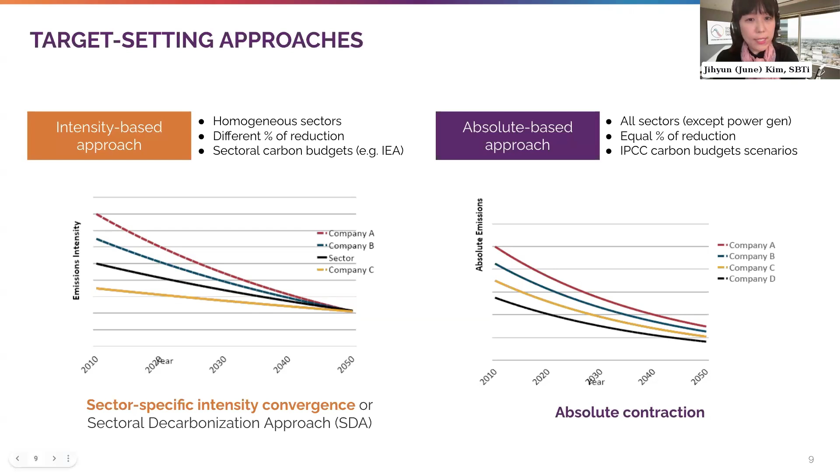The other method, on the right side, is used for all other sectors or emission sources, and is called cross-sector absolute reduction. It expects all companies to reduce emissions at the same annual rate. Both of these methods are used in the building criteria, and their application will be explained later in this webinar.

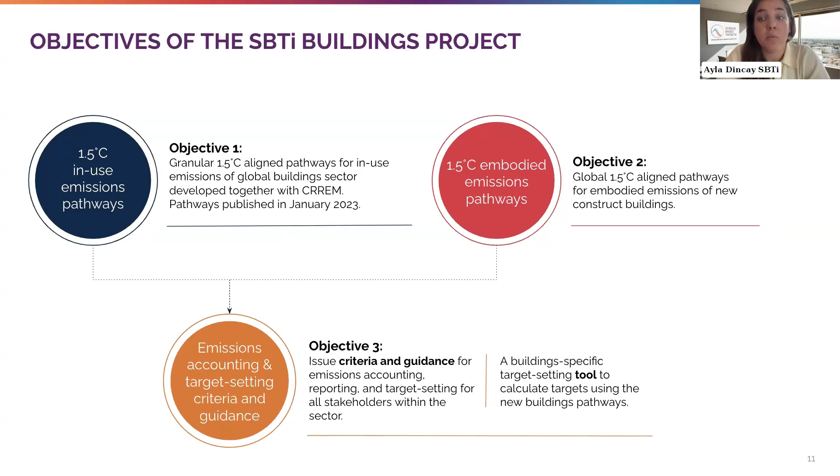The third objective was to develop criteria, guidance, and a target-setting tool for the built environment to develop and set greenhouse gas emissions reduction targets within the unique context of the building sector.

All companies and financial institutions should start their science-based target-setting journey by familiarizing themselves with the SBTi Corporate Net Zero Standard, the financial institution's near-term criteria, and the explanatory document. These documents provide the basis on which the sector criteria is built on.

As part of the buildings project, we have developed the following technical outputs. First one is the buildings criteria. The criteria document includes mandatory criteria that companies in the sector are required to follow when setting science-based targets.

Another important document is the building's explanatory document. The explanatory document provides further guidance on how to set targets using the criteria. It does not include new mandatory criteria.

The third important document is the embodied emissions pathway development description. This document provides background information on how the embodied emissions pathways were developed. The last document listed on this slide is the building's target setting tool.

This tool has been developed to help businesses in developing their emissions reduction targets following the sectoral decarbonization approach, or SDA for short, and the sector-specific absolute contraction method. The tool aggregates the targets resulting from the SDA and the absolute contraction method into an overarching company target.

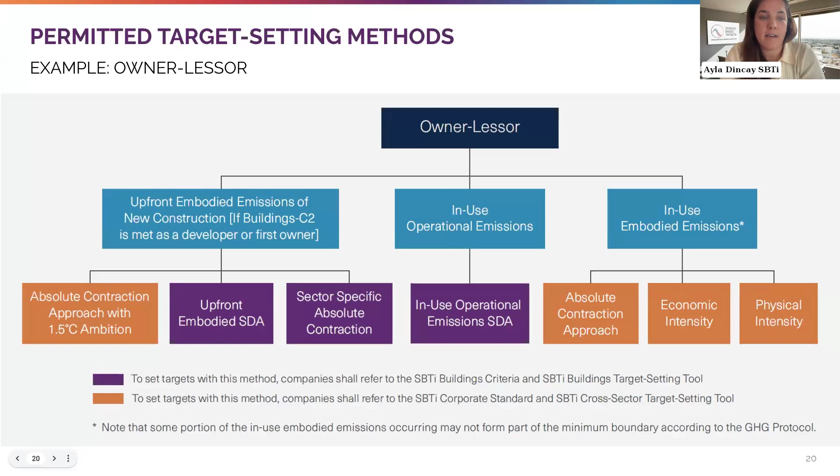And then moving to buildings C6, one of the important concepts included in the buildings criteria is the whole building approach. Companies must use this approach when accounting and setting SDA targets for in-use operational emissions.

Following the greenhouse gas protocol, companies have to account and allocate in-use operational emissions to different scopes in their inventory as usual. However, for target setting purposes, companies are required to follow the whole building approach, which means they need to aggregate all in-use operational emissions across all scopes into a single total.

The criterion C8 requires certain scope 3 categories to be included in the target boundary. The required emissions categories have been determined based on the relevance of each intended user's known business activities, the applicability of individual target setting methods, and the company's level of influence over associated emissions reductions. The details of which emissions shall be included within each user's target boundary are provided in Buildings Criterion C8.

For developers, this means the categories where upfront embodied emissions are accounted for. And for owner lessors, it means categories where tenants' operational emissions are included, usually category 13, downstream leased assets.

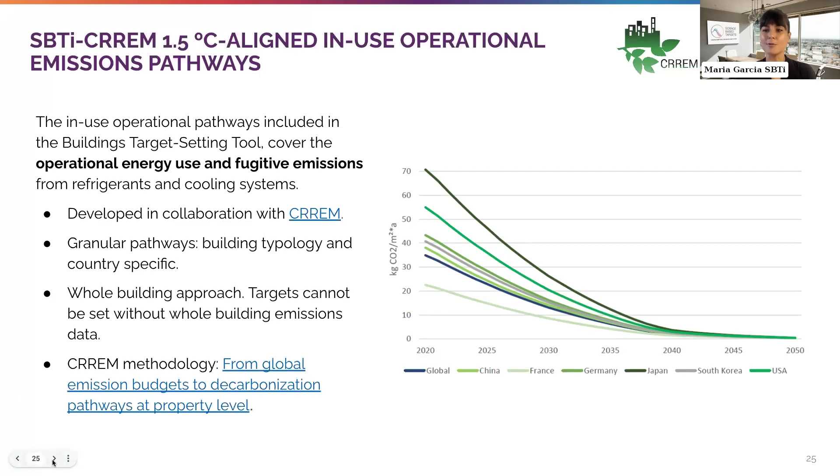All intended users of the building's criteria specified in criterion C3 are required to use the sector-specific intensity convergence approach, also known as the SDA method. Note that 'developers' is in brackets because if the developer meets the threshold for in-use operational emissions, it will be classified as an owner or property manager.

We have two deviations for this general rule. First, financial institutions can use all methods allowed in the financial institution near-term criteria to set targets on their real estate assets. The building's criteria provide guidance on the SDA targets, which is just one of the methods available. Second, property managers that may not have whole building emissions data available, and thus cannot follow the whole building approach, can set targets on their required categories using the 1.5 aligned methods defined in the SBTi corporate net zero standard.

The sector-specific methods are described in the building's criteria and the explanatory documents, but for other methods, users will need to refer to the relevant documents, which are the corporate net zero standard and the financial institutions near-term criteria.

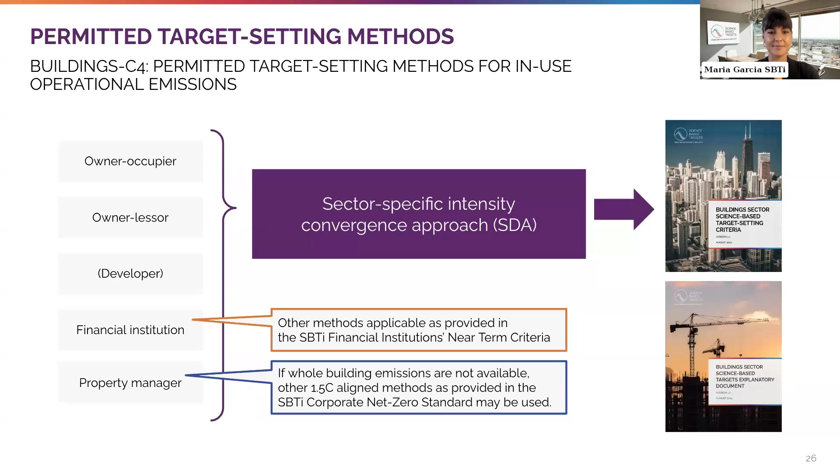Now I'm going to give you an example of how to calculate the in-use operational emissions using the buildings tool. On this slide you see a screenshot from the buildings tool, specifically the in-use near-term targets tab.

To start using the tool, you should begin in section A1 by selecting your preferred units. The SBTi uses the metric system, but unit conversion is embedded in the tool. Then the relevant geography is selected in section A2, and here we are using Spain as an example.

In section A3, the relevant building type is selected, and as you can see from the green OKs, all inputs are correct and the corresponding pathway has been found.

In section A4, emissions and activity data are included. In this example, a base year of 2022 is selected. The in-use operational emissions is an aggregation figure for the whole building emissions data. The floor area in the base year is entered, and as a target year we have selected 2030.

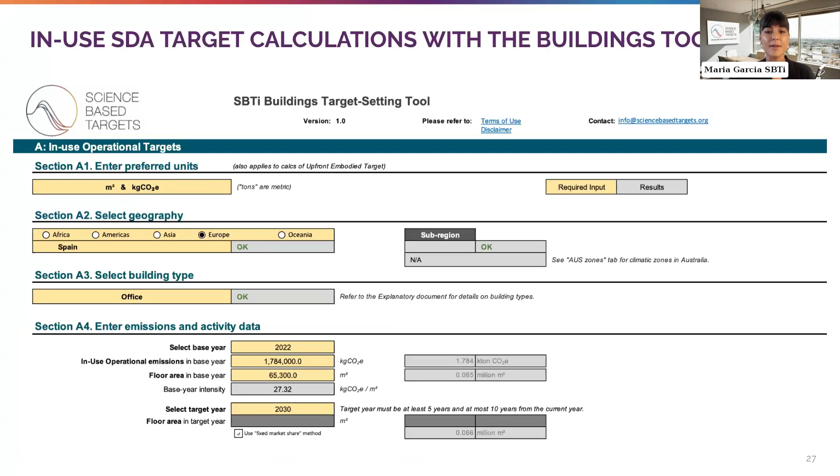Now that we have entered all the data required, we can scroll down to section A5 for the results. In our case, we move to the next slide. Here you can see the target modeling results. The tool calculates both absolute and intensity emissions for the target year, and the respective reduction rate for both as well.

For the SDA target, we look at the intensity graph on the right-hand side. The yellow curve is the selected CRREM SBTi pathway. The blue curve is the company-specific pathway calculated with the SDA for offices in Spain.

Based on the calculations, this company's target year intensity is 12.37 kilograms CO2 equivalent per square meter, and the reduction rate is 54.7% per square meter.

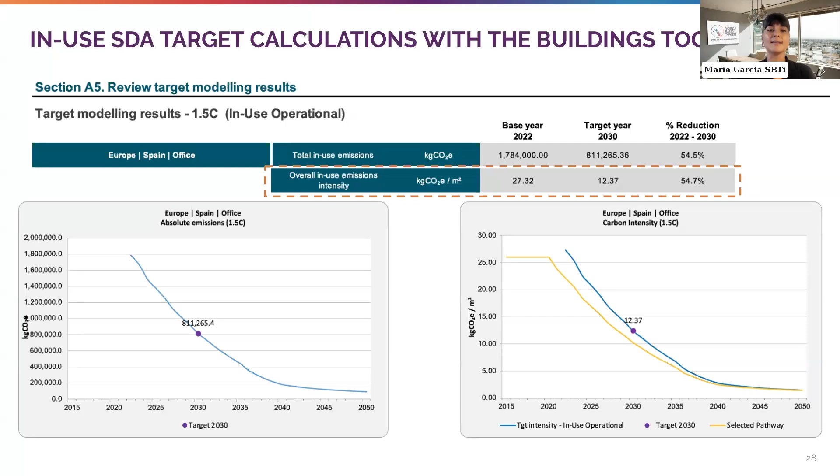Most companies have a more diverse target setting portfolio with a variety of building types and regions, and for these cases, the tool provides an option to aggregate targets.

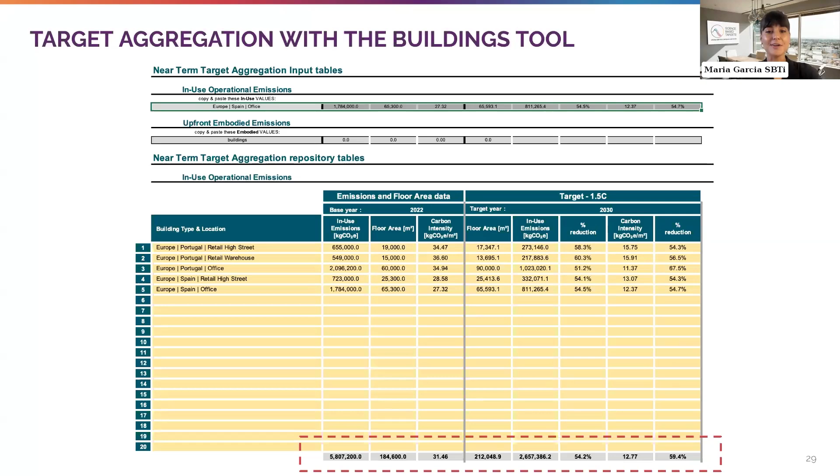Using the aggregated target reduction rate, companies can formulate their target. In this case, the wording would be as follows: 'Company X commits to reduce scope 1, 2, and 3 in-use operational greenhouse gas emissions of own buildings by 59.4% per square meter by 2030 from a 2022 base year.'

In the following slides, I will explain two alternative options provided in the buildings criteria for companies that are unable to set SDA targets, even though the SDA target setting method is the go-to option for most organizations.

The first special target setting option is called the fixed intensity target, developed especially for organizations with a high turnover in their portfolio. Companies and financial institutions with high portfolio turnover may find the SDA method challenging for reasons including reduced ability to effect building improvements due to short hold periods, difficulty collecting complete and accurate whole building use operational emissions data, and a frequent requirement to recalculate targets due to regular significant changes in the portfolio.

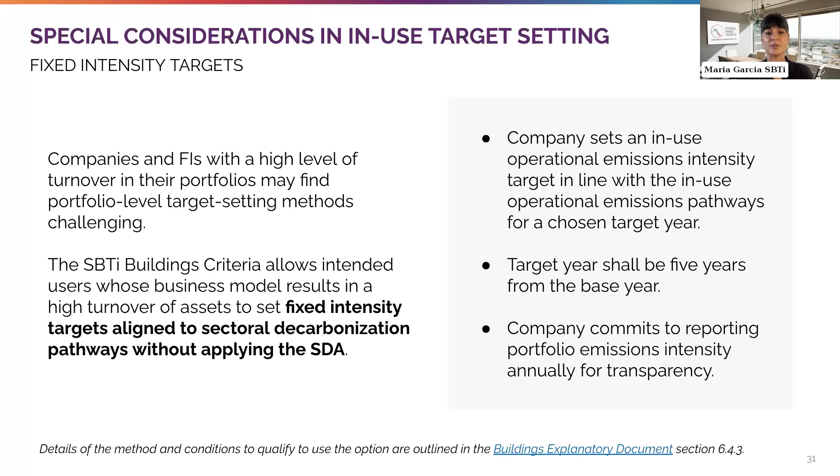In short, this means the company sets an in-use operational emissions intensity target in line with the in-use operational emissions pathway for a chosen target year. The target year shall be 5 years from the base year. More details of the methods and conditions to qualify for this option are highlighted in the explanatory document in section 6.4.3. Other relevant sector criteria still apply to companies and financial institutions choosing the fixed intensity target method.

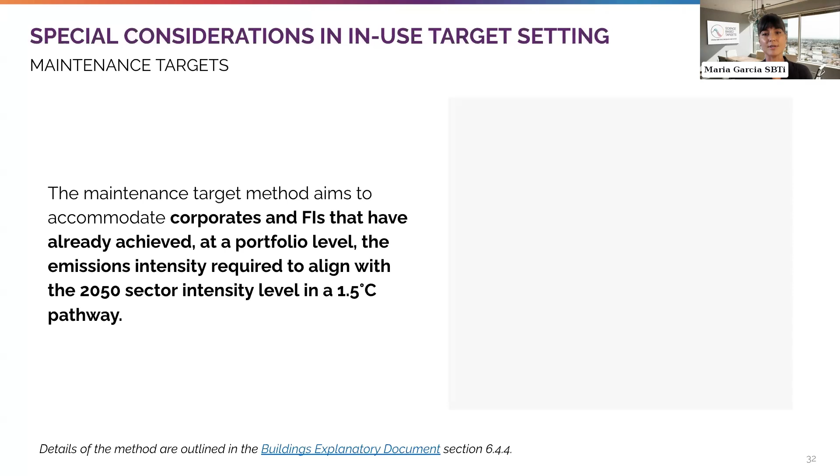The second special target setting option is for companies and financial institutions that have already met the emissions intensity required to be aligned with the 2050 sector intensity level. In this case, a company can commit to maintain the base year portfolio. They also commit to only finance and hold 1.5-aligned real estate assets. Companies with diverse portfolios can choose the lowest target year intensity of the relevant pathways.

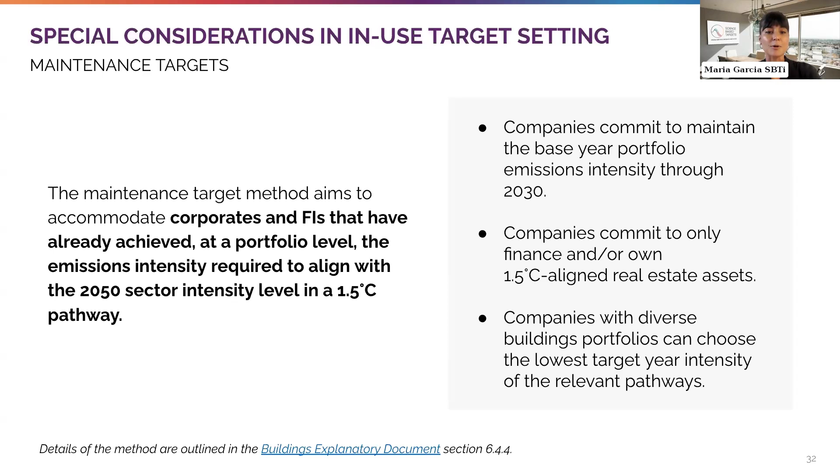And with this slide, I have reached the end of this section. Now I will hand over to June, who will facilitate a Q&A session to cover questions related to what has been presented so far. Thanks.

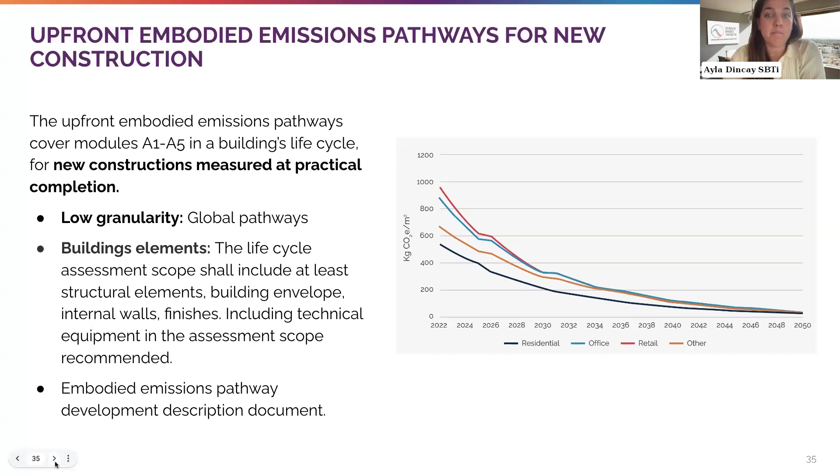Next, I will go through the target setting methods applicable to these pathways.

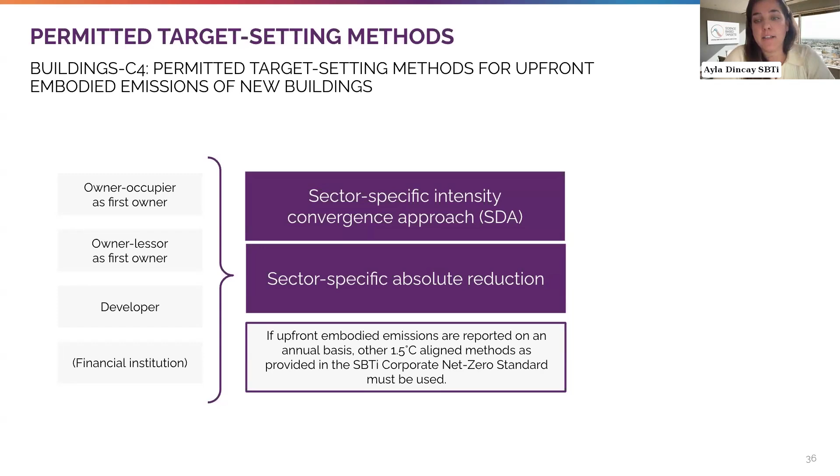These methods are only applicable when embodied emissions are reported in the inventory upon completion in Scope 3 Category 2 capital goods. If embodied emissions are reported in different scopes and categories, usually on an annual basis, 1.5C aligned methods must be used as provided in the SBTi corporate net zero standard.

The sector-specific methods are described in more detail in the buildings criteria and the explanatory document. For other methods, please refer to the corporate net zero standard or financial institutions near-term criteria.

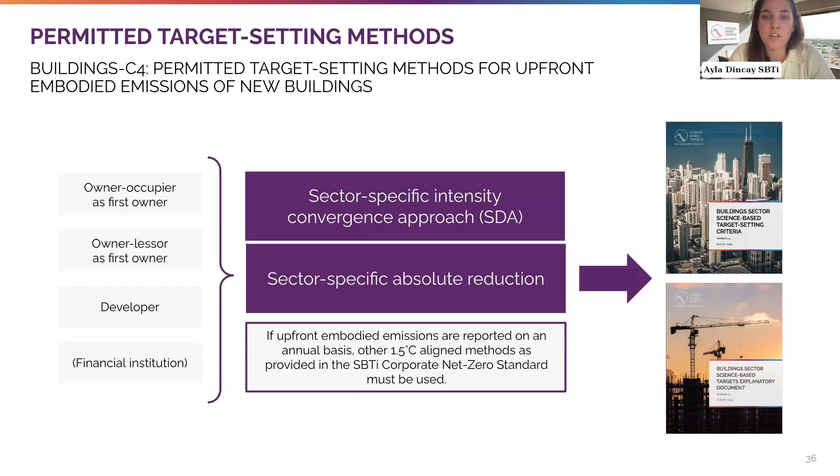Next, I will share an example on how upfront embodied absolute reduction targets are formulated using the buildings target setting tool. Setting SDA targets for upfront embodied emissions of new buildings follows a similar structure as for in-use operational SDA targets that Maria explained in the previous section, which is why we look at the absolute reduction target now.

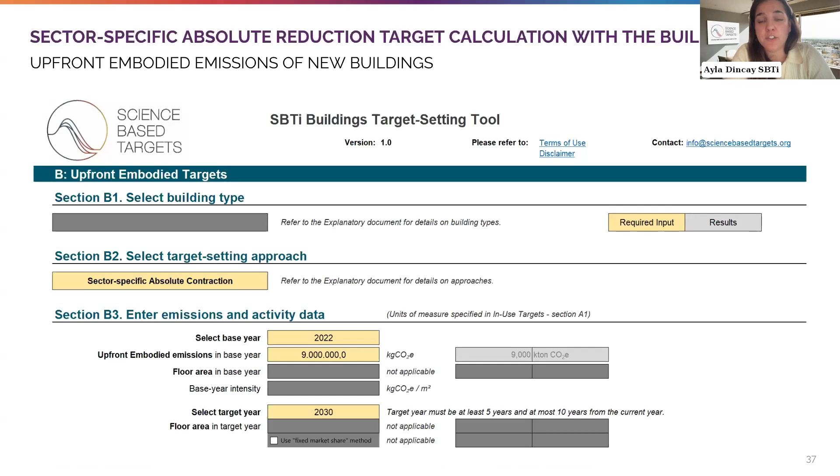Based on the calculations, this company's target year absolute emissions should be reduced by 30.9% in absolute terms.

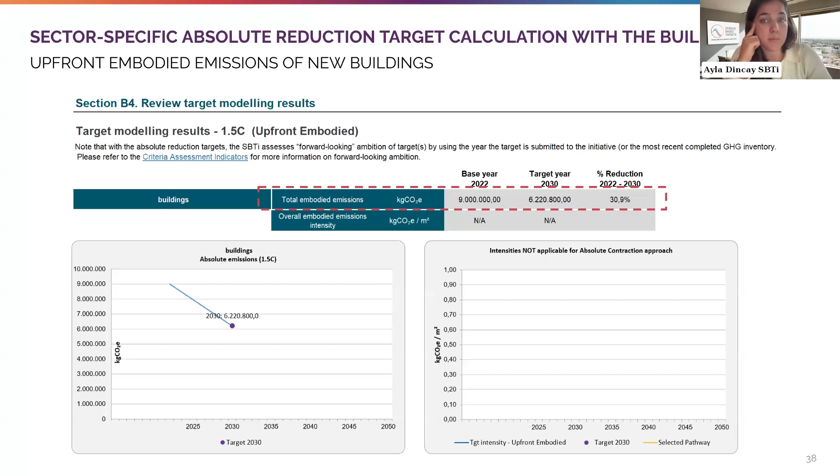Now, using the calculated reduction rate, this company can formulate its target. In this case, the wording would be as follows: Company X commits to reduce absolute Scope 3 upfront embodied GHG emissions of new buildings by 30.9% by 2030 from a 2022 base year.

With this, we are at the end of this section, and I would like to hand back over to June to facilitate a live Q&A and respond to questions that you have submitted.